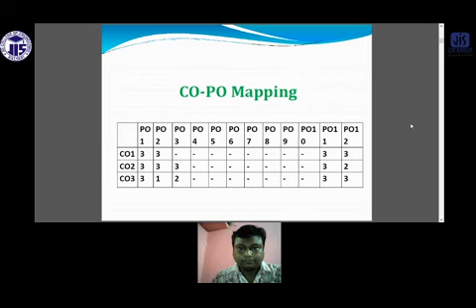Hello student. Today we will discuss the various transportation committees and their recommendations, which comes under the module of transportation management. We will discuss the various types of committees from ancient time to the present situation, the development of the Highway Act and National Highway Act, the various types of roads, construction methods, and the recommendations of these various committees.

Transportation engineering is the application of technology and scientific principles to the planning, functional design, operation and management of facilities for any mode of transportation, in order to provide safe, efficient, rapid, comfortable, convenient, economical and environmentally compatible movement of people and goods from one place to another.

We have already discussed the definition of transportation, and I gave you an example of packers and movers. The movement of packing and the movement of human beings or objects is not only related to direct movement, there is also indirect movement. This whole thing is clubbed together and known as the transportation system. So how to manage this system is the topic of today's discussion, the transportation system management.

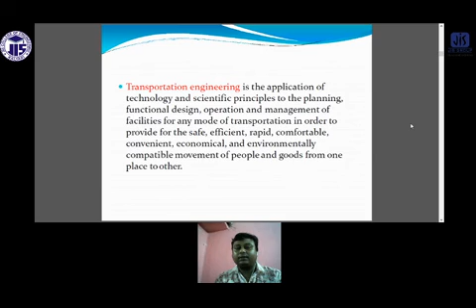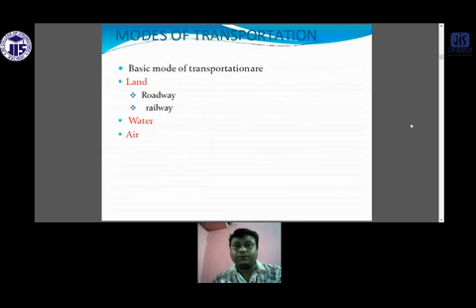Under the module of transportation management, what are the various committees? There are various modes of transportation, as you all know. On land it is roadway, railway, water, air, and another is pipeline network. In highway, the car, bus, truck, non-motorized etc. In railway, the passenger and goods train. In airways it is aircraft and helicopter, and in waterways it is ship, boat etc., and continuous flow system like pipeline or belt, then ropeway, elevator.

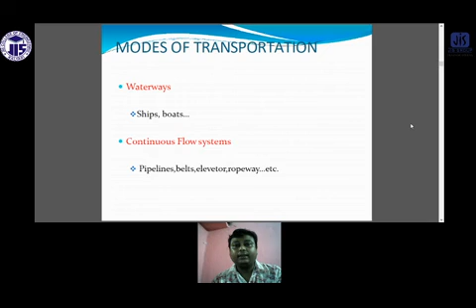So what are the merits and demerits of airways? It is the fastest among all modes, more comfortable, time saving, but uneconomical. That is why the land transport, that is railway and roadway, are the most promising and most used by users across the globe. The maximum people use only these two, because the main reason is the easiness of accessibility, and second is the cost aspect, because traveling by air takes a huge cost which cannot be...

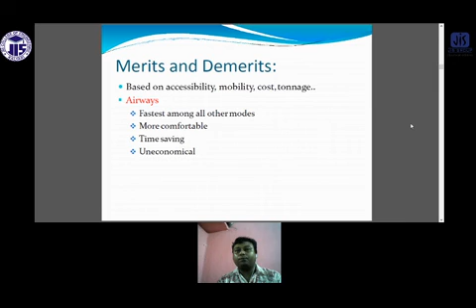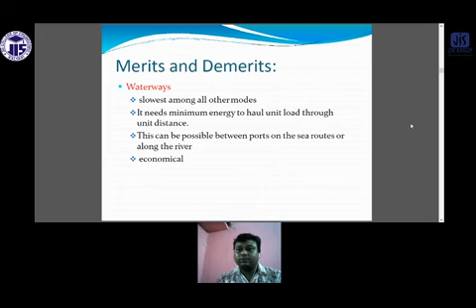...given, or cannot be borne by everyone. That is why, though not at that level of comfortability compared to flight, whatever comfortability is pocket friendly, we prefer railway and highway. The merits and demerits of waterways: it is the slowest among all other modes, it needs minimum energy to haul a unit load through unit distance. This is possible between ports, on sea routes, or along rivers, and it is economical.

In railway, the transportation along the railway track is advantageous between stations, both for passengers and goods, particularly for long distance. It depends upon road transport, that is the road could serve as a feeder system. Energy required to haul a unit load through unit distance by railway is only one-fourth to one-sixth of that required by road, and there is also the safety aspect. Here is a new common term, the feeder system. So what is the feeder system?

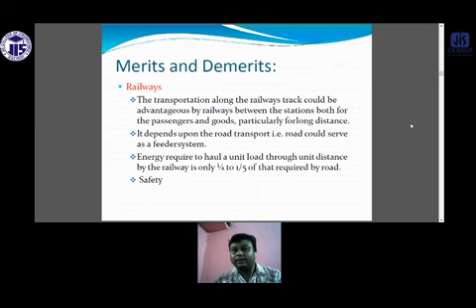If you remember, I discussed this one day. Suppose I want to go to the nearest station, or nearest metro station, or nearest bus stand, I can book a taxi, Ola, Uber or any local vehicle from my door itself. The service which connects you from your doorstep to the nearest public transport is called the feeder service.

For highways, it gives maximum service to one and all. It gives maximum flexibility for travel with reference to routes, direction, time, and speed of travel. It provides door-to-door services, and other modes depend on it. It requires small investment for the government. Motor vehicles are cheaper than other carriers like rail locomotives and wagons.

It saves time for short distances, but there is a high degree of accident due to the flexibility of movement. Whenever you give full flexibility of movement, the chances of accident will definitely be there, because in highway or roadway travel there is no such restriction on the movement of traffic. The restrictions or rules and guidelines are maximum in airway, then railway, then waterway, and finally roadway.

But as it is flexible, the chances of accident are also more, because until and unless you give some restrictions, some fine or some punishment to the user, it won't work. So that is why the probability of accident in the highway or roadway is the maximum.

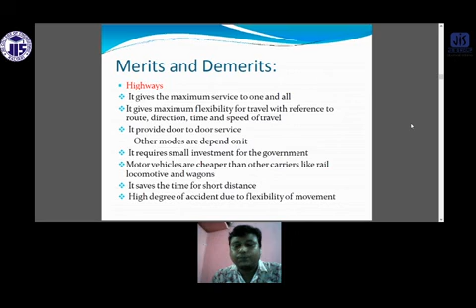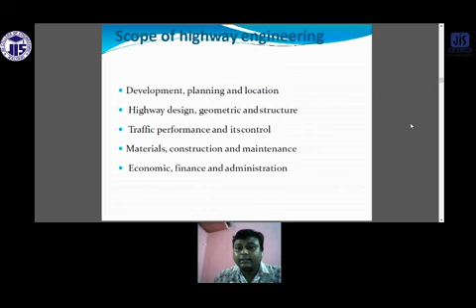The scope of highway engineering includes development, planning, and location. We will discuss how we can develop the highway, how we plan the highway, and what locations need to be focused on. Then highway design - geometric and structure - geometric design of the highway, traffic performance and its control, the various traffic parameters like speed and traffic volume, and the materials and construction and maintenance. The last one is economics, finance, and administration.

The role and impact of transportation includes economic development, societal development, spatial development, cultural development, and political development. All of this development depends on the transportation system.

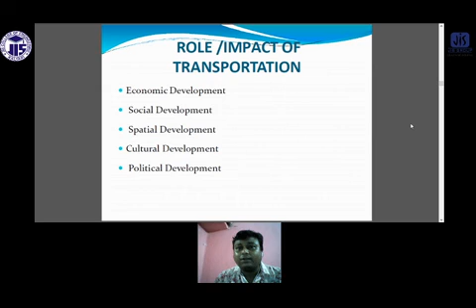Suppose I want to construct one national highway in a particular area which is not developed. Just after the starting of the connectivity, you can find that developers are coming, they purchase the land, they start their construction business, some small shops come up, then the population increases day by day, an agricultural hub will be created, the industry will be created. So based on the transportation, the periphery of the transportation is such that the whole city can be constructed or come up from a national highway or from any road of national importance.

What are the various characteristics of road transport? The roads are used by various types of road vehicles like passenger cars, buses, trucks, pedal cycles, animal-drawn vehicles, and many more. It requires a relatively small investment for the government - though the investment is very high, it is relatively small compared to railway and airway. It offers complete freedom to road users to transfer the vehicle from one lane to another lane, from one road to another road according to need and convenience.

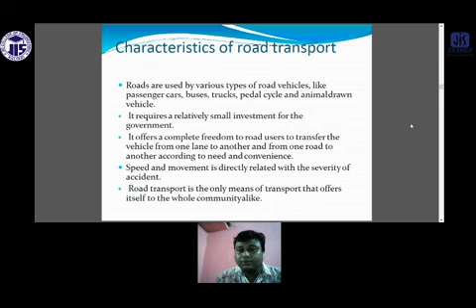That is why the chances of accident are high. Speed and movement is directly related to the severity of accident - yes, definitely. If the volume is comparatively high, then the speed will be less, and then the chances of accident will be more. The road transport is the only means of transport that offers itself to the whole community alike.

What is the historical development of road construction? It is not like that from yesterday I thought to construct a road, and tomorrow I build a 5 kilometer road with high definition material and high technology. The concept of the construction of the road came from the World War.

Why was the need for the road initiated? Because for the movement or transport of goods and weapons during World War One and World War Two, the necessity for the construction of roads was initiated. The oldest mode is the footpath, animal ways, and cart path. As civilization evolved, the need for transportation increased. In Roman roads, around 500 BC, they were built straight regardless of the gradient.

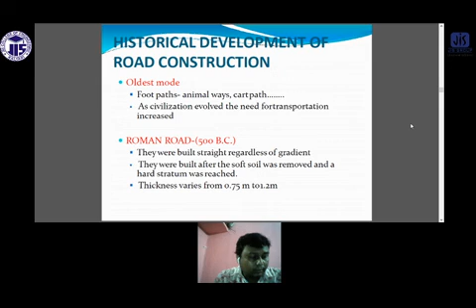They were built after the soft soil was removed and hard stratum was reached, and thickness varies from 0.75 to 1.2 meters. This is Roman road construction.

You can see the various components of a Roman road. The first component at the bottom of the trench: the Romans put a big layer of stone, broken stone and pebbles.

Cement and sand were used to make a firm base, placed in layer 2. In layer 3, they provide a cement mix with broken tiles. In layer 4, they provide the paving stone for the surface of the road.

These were cut so they fitted together tightly, and kerb stones at the side held in the paving stone and made a channel for the water to run away. So basically, this is provided for water percolation through this.

This relates to the term camber. Camber is basically provided as the projected part of the road in the perpendicular direction of the road. It is provided so that water cannot stack on the surface of the road - it should be drained off.

So the concept of draining water itself comes from Roman times, but the methods are changing due to the availability of latest technology, new materials, and skill level.

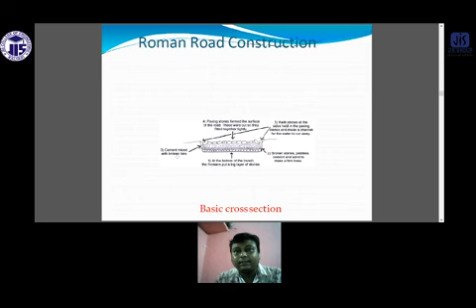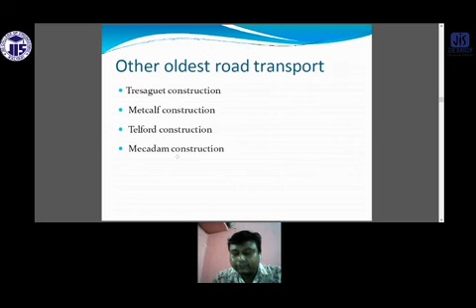The other oldest road transport constructions are Tresaguet construction, Metcalf construction, Telford construction, and macadam construction. These are the various types of construction used since ancient times.

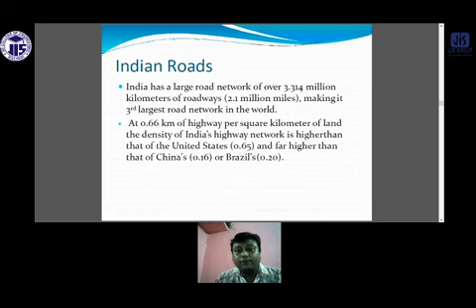Now talking about Indian roads - India has a large road network of over 3.314 million kilometers of roadways, making it the third largest road network in the world. At 0.66 kilometers of highway per square kilometer of land, the density of India's highway network is higher than the USA at 0.65, China at 0.16, and Brazil at 0.2.

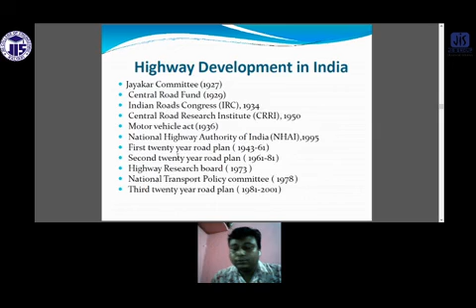So what did the Jayakar Committee suggest or recommend in 1927? After World War I, the number of motor vehicles using the road increased, demanding a better road network. In 1927, the Indian Road Development Committee was appointed by the government with M.R. Jayakar as chairman.

Road development in the country should be made a national interest, since local governments do not have the financial and technical capacity for road development. An extra tax should be levied on petrol from road users to create a road development fund. Even today, some taxes are taken from petrol for the maintenance and development of roadways.

The committee recommended establishing a semi-official technical institution to pool technical knowledge, share ideas, and act as an advisory board, and to create a national level institution to carry out research, development works, and consultation.

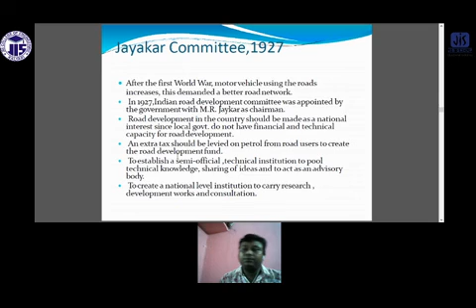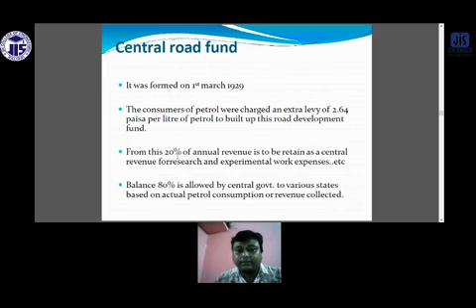The Central Road Fund was formed on 1st March 1929. Consumers of petrol were charged an extra levy of 2.64 paisa per liter at that time to build up this road development fund. From this, 20% of the annual revenue is retained as central revenue for research and experimental works expenses, while the balance 80% is allotted by the central government to the various states based on actual petrol consumption or revenue collected.

The Central Road Fund 1929 CRF Act came into picture in 2000. It governs distribution of 100% of the cess on petrol as follows: 57.5% for national highways and 30% for state highways, as per MORTH, the Ministry of Road Transport and Highways. 12.5% is for safety works on railroad crossings, and on diesel, 50% goes for rural development.

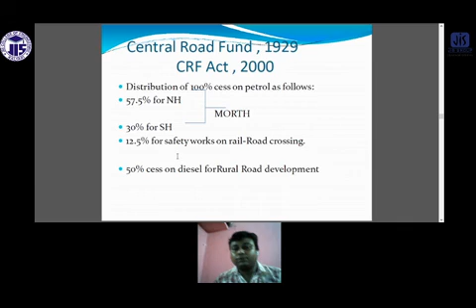The Indian Road Congress, IRC, was constituted in 1934, and we are still following the various guidelines of the IRC for the construction and maintenance of roads.

This central semi-official body known as the IRC was formed in 1934 to provide a national forum for the regular pooling of experience and ideas on matters related to the construction and maintenance of highways. It is an active body controlling the specification, standardization, and recommendation of material design for roads and bridges. It publishes journals, research publications, and standard specification guidelines to provide a platform for expression of professional opinion on matters related to roads and road transport.

The Motor Vehicle Act was introduced in 1939, and based on that it regulates road traffic in the form of traffic laws, ordinances, and regulations. Three phases primarily covered are control of drivers, vehicle ownership, and vehicle operation. It was revised in 1988.

The CRRI was introduced in 1950. It is engaged in carrying out research and development projects. Basically, CRRI is itself a research institute, where various research on highway construction materials and testing of construction materials for highways are conducted. It is an institute constituted in 1950, and it is still one of the pioneer institutes in India in the context of highways.

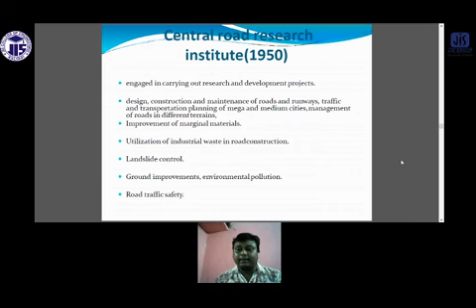CRRI deals with design, construction, and maintenance of roads and runways, traffic and transportation planning of mega and medium cities, management of roads in different terrain, improvement of marginal materials, utilization of industrial waste in road construction, landslide control, ground improvement, environment, pollution, and road safety. So basically CRRI is an institution which deals with all research related activities, including utilization of waste material for road construction, landslide control, and ground improvement techniques.

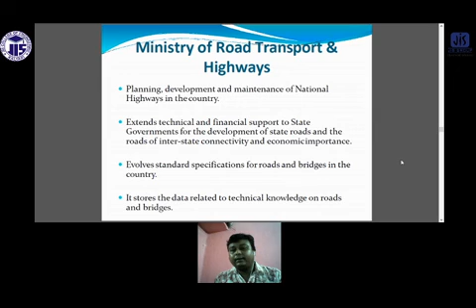The Ministry of Road Transport and Highways handles planning, development, and maintenance of national highways in the country, and extends technical and financial support to state governments for development of state roads and roads of interstate connectivity and economic importance. It evolves standard specifications for roads and bridges in the country, and stores data related to technical knowledge on roads and bridges.

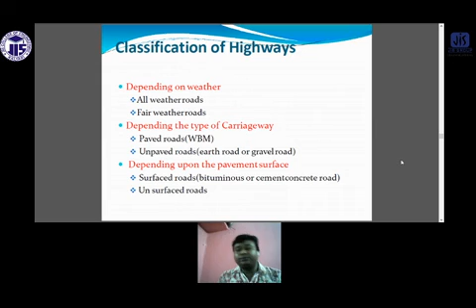Classification of highways: based on weather, there is the all-weather road and the fair-weather road. Depending on the carriageway, there is the paved road and the unpaved road. Depending upon the pavement surface, there is the surfaced road and the unsurfaced road. The surfaced road means a bituminous road or a cementitious road, where bituminous means flexible pavement and cementitious means rigid pavement.

Based on traffic volume, there is heavy traffic volume road, medium traffic volume road, and light traffic volume road. Based on load or tonnage, it is classified as class 1, class 2, or class A, class B tons per day. Based on location and function, it may be a national highway, state highway, MDR (major district road), ODR (other district road), and VR (village road).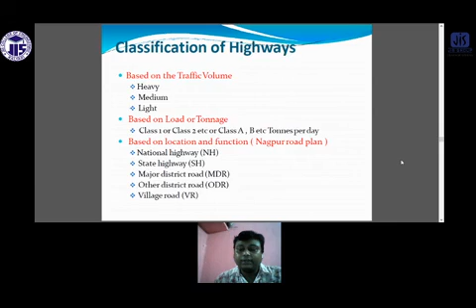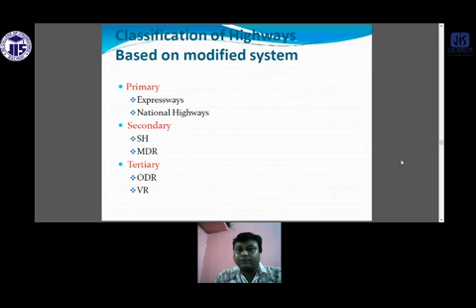Classification of highways based on the modified system: primary includes expressway and national highway; secondary includes state highway and major district road; tertiary includes other district road and village road. This is one example of an expressway. You can see the speed limit for the expressway is a high speed of 120 kilometers per hour, and the land width is 90 meters.

The full access control connects to the major points. No slow moving traffic allowed, and no loading, unloading, and parking are allowed on this route.

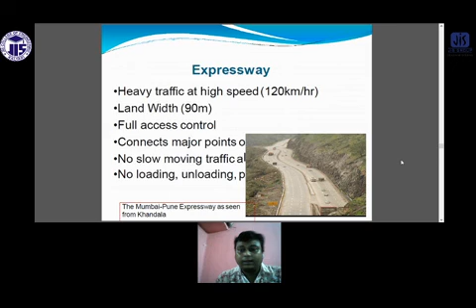National highways are the main highways running through the length and breadth of India, connecting major parts, foreign highways, capital of the large state, and the large industrial and tourist centers, including roads required for strategic movement for the defense of India.

The national highways have a total length of 70,548 kilometers. Indian highways cover 2% of the total road network of India and carry 40% of the total traffic, so you can imagine the importance of the national highway. It is only 2% of the total road, but it carries 40% of the total traffic load in India.

The highway connecting Delhi, Ambala, Amritsar is denoted as NH1, whereas the bifurcation of this highway beyond Jalandhar to Srinagar and Uri is denoted as NH1A. The longest highway in India is National Highway 7, which stretches from Varanasi in Uttar Pradesh to Kanyakumari, the southernmost point of Indian land.

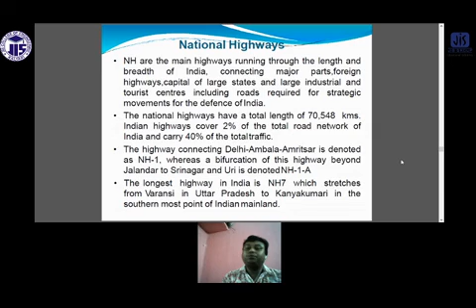The shortest national highway is NH47A, which stretches from Ernakulam to Kochi and covers a length of only 4 kilometers.

The golden quadrilateral is one of the costliest projects in Indian highways. It is the NH2, which connects Delhi and Kolkata over 1453 kilometers.

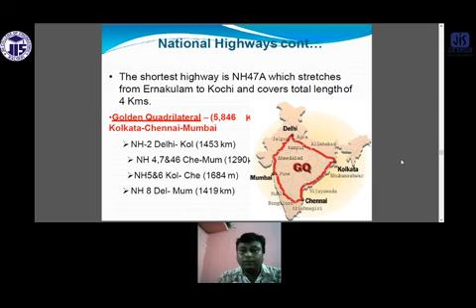Then NH4, 7 and 46 between Chennai and Mumbai cover 1290 kilometers. Then NH5 and 6 between Kolkata and Chennai, which is 1684 kilometers, and National Highway 8, which connects Delhi and Mumbai over 1419 kilometers.

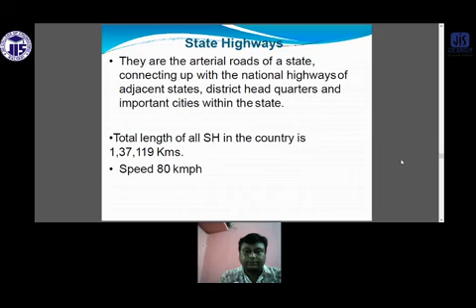State highways are the arterial roads of a state, connecting up with the national highways of adjacent states, district headquarters, and important cities within the state. The total length of state highways in the country is 1,37,119 kilometers, and the speed is between 80 to 90 kilometers per hour.

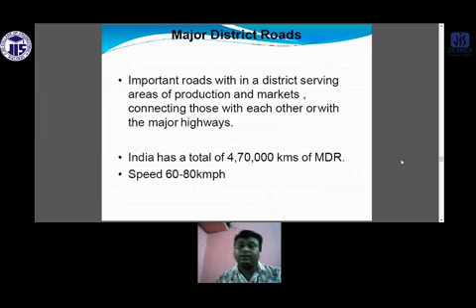Major district roads are important in serving areas of production and market within a district, connecting those with each other and with the major highways. India has 4,70,000 kilometers of these roads, with speeds between 60 to 80 kilometers per hour.

Now, ODR - what is ODR? The ODR serves rural area production, providing them with an outlet to market centers or other important sources like MDR or state highway. So basically the purpose of ODR is to connect the area with the MDR and the state highway.

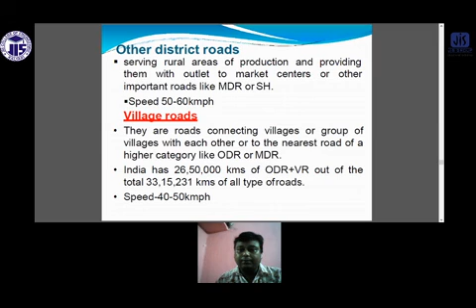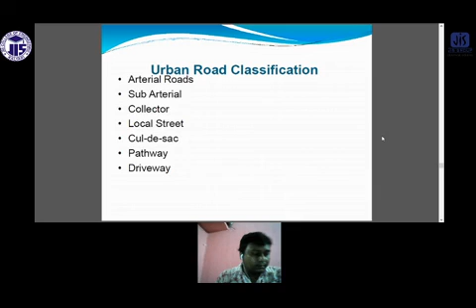What is an arterial road? No frontage access, no standing vehicle, very little cross traffic, design speed of around 80 kilometers per hour, land width of 50 to 60 meters, divided roads with full or partial parking, and pedestrians allowed to walk only at the intersection.

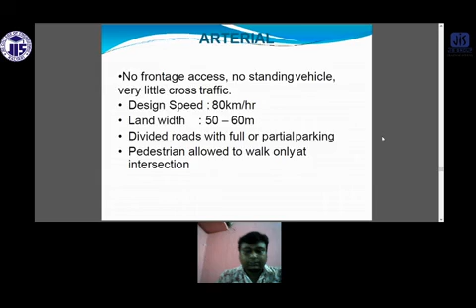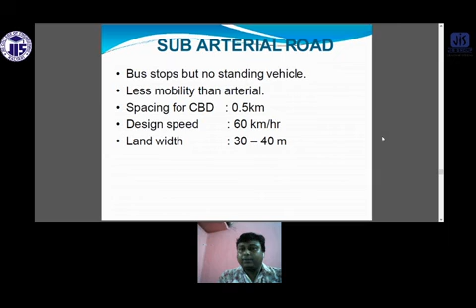Subarterial road: bus stops allowed, no standing vehicle, less mobility than arterial. Spacing for CBD, which is central business district, is 0.5 kilometer, design speed of 60 kilometers, and land width of 30 to 40 meters.

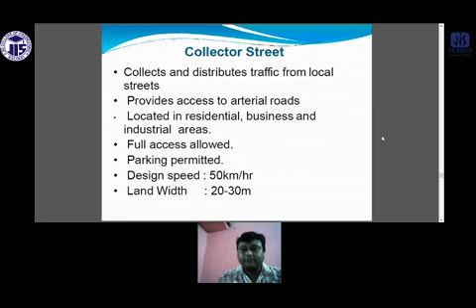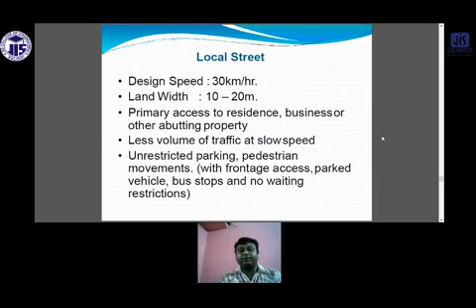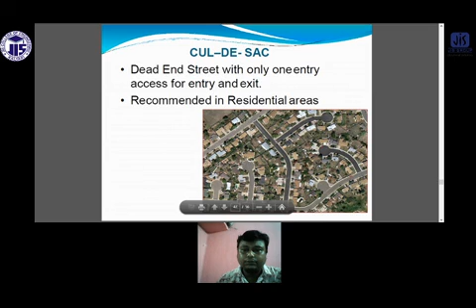So this is the dead end street, meaning after that there is no space to move traffic or pedestrians. This is the end of the street, known as the cul-de-sac. This type of street is basically provided in residential areas. If you see, this road ends here, you cannot move further. So this type of road is provided basically in residential areas.

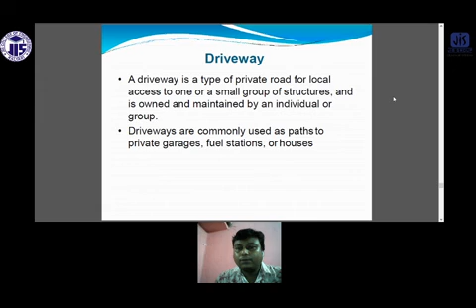Now driveway - a driveway is a type of private road for local access to one or a small group of structures, owned and maintained by an individual or group. Driveways are commonly used as a path to private garages, fuel stations and houses.

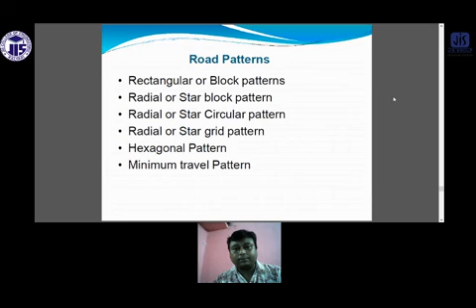Now what are the various types of road patterns? There are various types like rectangular, radial or star block pattern, radial circular pattern, radial grid pattern, hexagonal pattern and the minimum travel pattern.

Now what these committees have suggested in their various plans. For the first plan, because without planning we cannot think for tomorrow. Every time we plan for our development - personal planning, institutional planning, local planning, global planning - for each and every planning, the development, the planning should be there.

So in the first 20 years, the time was 1943 to 1963. The first plan was fixed, but fortunately they completed it within 18 years, concluding the work in 1961. The conference of chief engineers held at Nagpur finalized the first 20-year road development plan for India in 1943, called the Nagpur Road Plan.

Road network was classified into 5 categories. The responsibility of construction and maintenance of national highways was assigned to the central government. The target road length was 5,32,700 km at the end of 1961. Density of about 16 kilometers of road length per 100 square kilometer area would be available in the country by 1963.

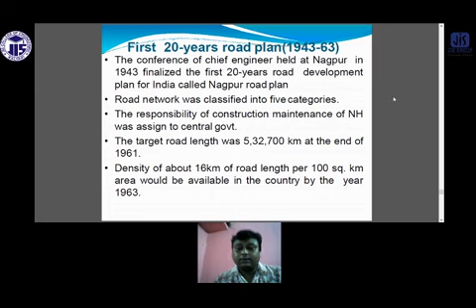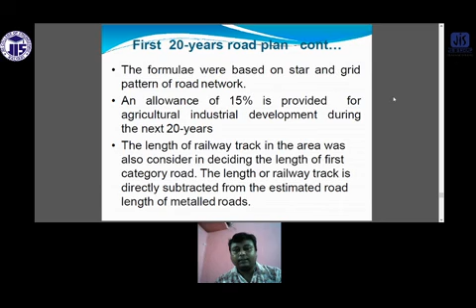The formula was based on the star and grid pattern of the road network. An allowance of 15% is provided for agricultural and industrial development during the next 20-year road plan, and the length of railway track in the area was also considered in deciding the length of the first category road.

The second 20-year road plan was initiated in 1961 and ran up to 1981. It was initiated by IRC and finalized in 1959 at the meeting of chief engineers. It is known as the Bombay Road Plan. The target road length was almost double that of the Nagpur Road Plan.

It was 10,57,330 kilometers, and the density is also double that of the first plan - it was 16 kilometers per 100 square kilometers, but now it is 32 kilometers per 100 square kilometers, with an outlay of 5,200 crores.

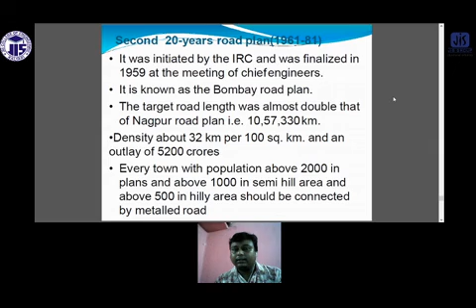Every town with population above 2,000 in plains, above 1,000 in semi-hill areas, and above 500 in hill areas should be connected by metal road. The maximum distance from any place in the semi-developed area would be 12.8 km from a metal road and 4.8 km from any road.

Expressways have also been considered in this plan, and 1600 kilometers of length has been included in the proposed target national highway. Length of railway tracks was considered independent of the road, and 5% was provided for future development.

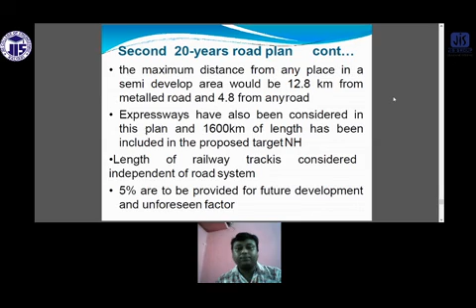In the third 20-year road plan, from 1981 to 2001, future road development should be based on the revised classification of the road system, to develop the rural economy and small towns with all essential features. Population over 500 should be connected by all-weather roads, and density increases from 32 kilometers per 100 square kilometers (as per second road plan) to 82 kilometers per 100 square kilometers.

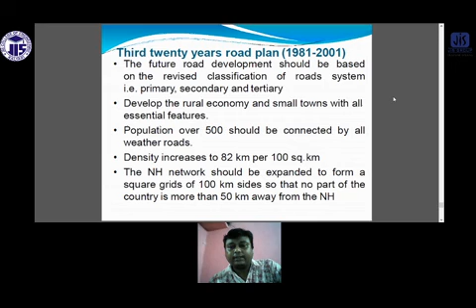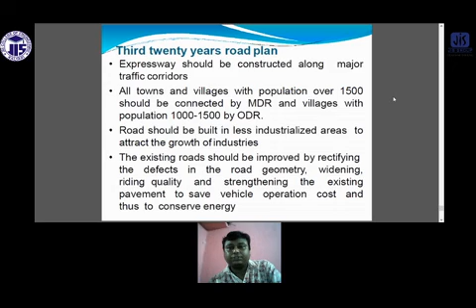The national highway network should be expanded to form a square grid of 100-kilometer side, so that no part of the country is more than 50 kilometers away from a national highway. In the third road plan, all towns and villages with population over 1500 should be connected by MDR, major district roads, and villages with population of 1000 to 1500 by ODR, other district roads.

So this is about our today's discussion - the various committees, the Jayakar committees, our National Highway Committee, CRF, CRRI, National Highway Act, and our various recommendations for the first 20 years, second 20 years, and third 20 years. Basically, our today's learning outcome, in one sentence, is that the historical development of the highway from ancient time to till date has been discussed in today's class.